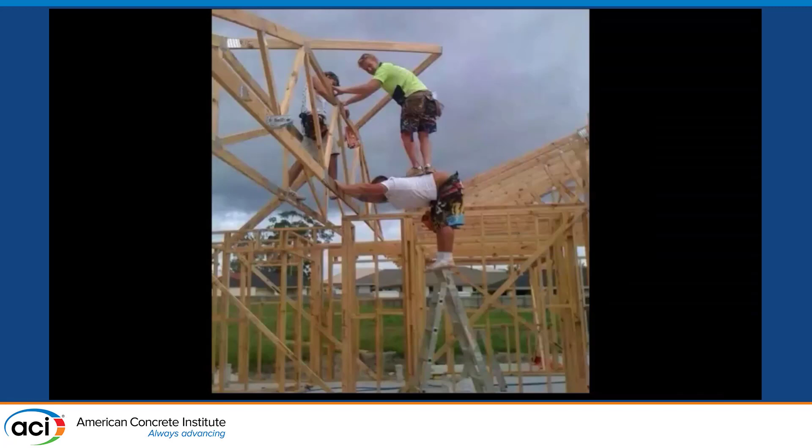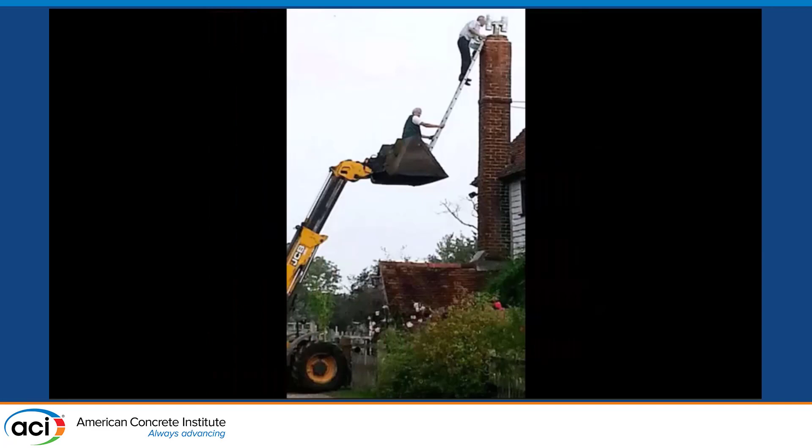to be talking about. So this first one, these guys, they've got a short little ladder here and not quite enough height to it, so you get one big strong guy and presto, you don't need scaffolding, right? Who needs scaffolding when you have guys like that? Here's another one. You've got a piece of equipment, but the bucket doesn't raise high enough. Put a ladder in it, get this dude up on top, and presto, you fix your chimney.

That's collaboration. Another one. Now this is a good one because you've got two ladders. You've got this thing going all the way up and then a small one strapped to it and a guy changing a light bulb. And then for collaboration, you've got a supervisor down here thinking, man, I'm glad I'm not up there. Glad it's him and not me.

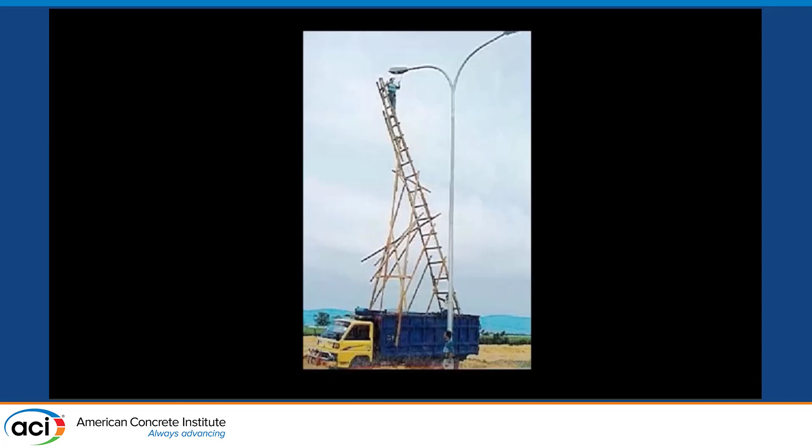Now, speaking of ground, I want to ground this presentation and talk about why collaboration matters. So the outline of the next 20 minutes, I'll discuss why collaboration is so critical to project success. I'll give some case studies, good and bad, and then discuss a little further about PRO, how it will help the industry. I hope most of you, maybe all of you, were at the luncheon today, where we had some great speakers, Dan Baker, Jeff Coleman, and following me, by the way, is Charlie Thornton, one of the most renowned structural engineers on the planet. So we have some great opportunities for learning lined up for you here today.

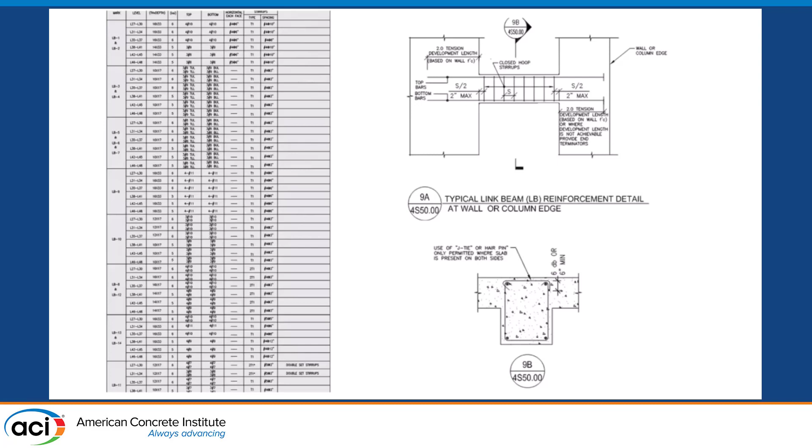It's impossible to build. This beam was literally impossible to build because they had 8 top bars, 8 bottom bars, 4 stirrup legs, the perimeter stirrup plus these 2. You've got the ears up here on the stirrups, of course, too, that get in the way. The out to out on the stirrup is 9 inches. So from this face to this face is 9 inches because you're 1.5 inches. It's a 12-inch wall, by the way, 12-inch wall.

So you're 9 inches out to out, and then you have to get all these horizontal bars through the shear wall vertical bars beyond. So you have about 6 inches right here. You've got to get all that through there. It was impossible. We laid this out; this was one of hundreds of link beams that we drew up, just trying to understand what had gone wrong

here in the field. Now, in the normal course of events, if the drawings had been done this way and they were issued and the contractor couldn't build the beams, you'd have an RFI, you'd have a discussion, you'd have some job site meetings, and you'd fix it. You'd fix it. It shouldn't have been issued that way by the structural engineer, but it was. It could have been fixed before it was built, but the communication had dropped to zero.

The architect was fighting the engineer was fighting the contractor was fighting everybody else. It was just a fist fight, and the contractor was determined to make schedule. So what he did was he would install as much rebar as he could fit, and the rest he'd just leave it out. That's how they built the building.

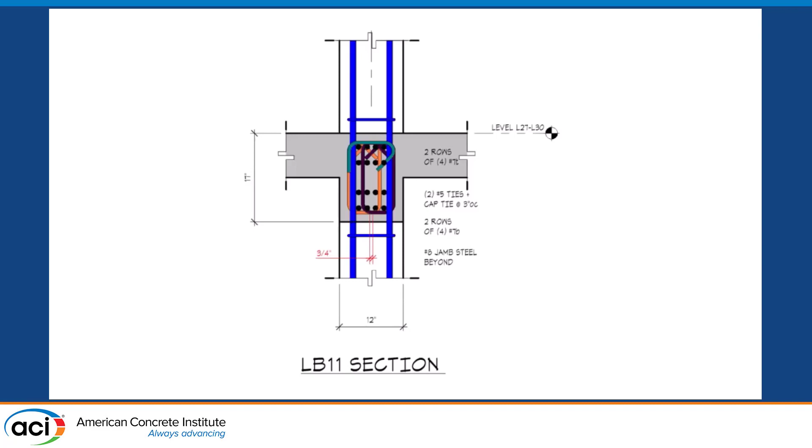Now I want to go to a good example, what I think is a good example. This happens to be one of our projects in my office right now, and just to set the stage, it's called The Bellevue because it's in Bellevue, Washington, about a mile from my office, a little less than that. And what it is, 3 towers. There's a 5-star hotel over here. Actually, 5-star hotel, 2/3 of the way up, and then residential. 2 other residential buildings over the top of a retail podium, over the top of 6 stories of subterranean parking.

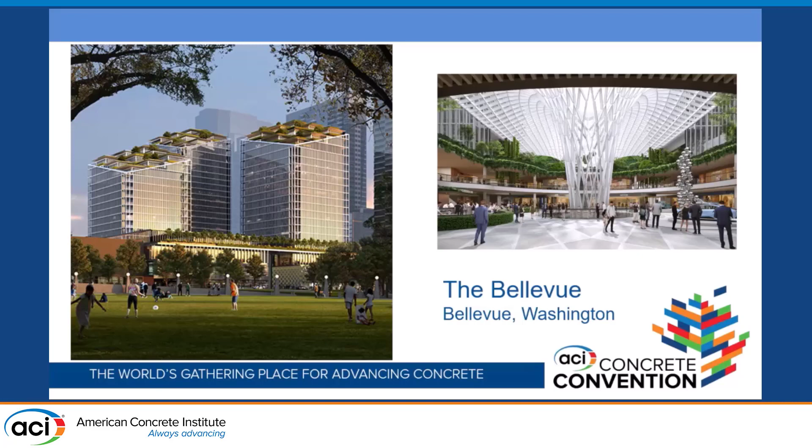Here's a shot of what it will look like. It's a very, very high-end retail space. One of the most successful malls on the West Coast happens to be right over here, and they want that to be contiguous and joined at the hip, essentially, to this new building. And so it's all being driven by the opulence of the retail and the buildings above, and the structure took a back seat, at least initially. Here's another picture of it. This shows a view from the Bellevue Downtown Park looking to the northeast.

And here's a cross section. You can see 2 of the 3 towers and the retail, 3 stories of retail here, actually 4 stories, and then 6 levels of subterranean parking. And the challenge structurally is, as anybody who's worked on almost anything knows, that the columns in the tower may or may not align with columns in the retail, which probably don't align with columns in the parking.

So you got to find a way to get the columns from here down to there and minimize the amount of transfer. That's the goal. That's the goal. So you've got to get the tower columns down through the retail, down through the lobbies, down through the parking, and get them into a foundation without too many transfer beams.

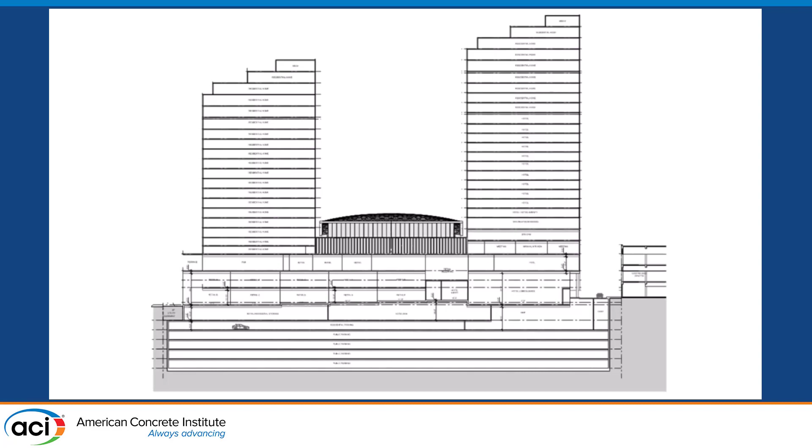A little more background information on what this project is about. You can see this very dramatic sort of skylight wing. The architect on this project is out of New York City. I won't mention their name, but they're a very well-known, high-end global architectural firm. And they've done some beautiful, beautiful, beautiful work.

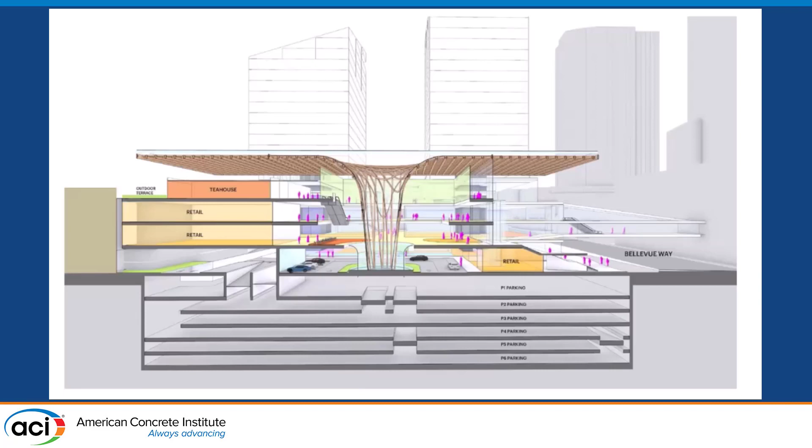Now, diving into some of the detail. If we look at the typical parking plate, we have 6 of these, and you can see that it's unusual in the fact that it's one-way angled parking throughout. So the owner of this building, who owns a neighboring shopping center, is really, really adamant that this be user-friendly parking. Minimal columns.

So we have 52-foot spans across the parking modules, columns at normally 30 feet on center north-south, and we need to preserve that throughout the entire parking plate for all 6 levels. So it will park just like you're driving into Safeway. Instead of having columns at the rear bumpers, which we would like to do, we're spanning 52 feet.

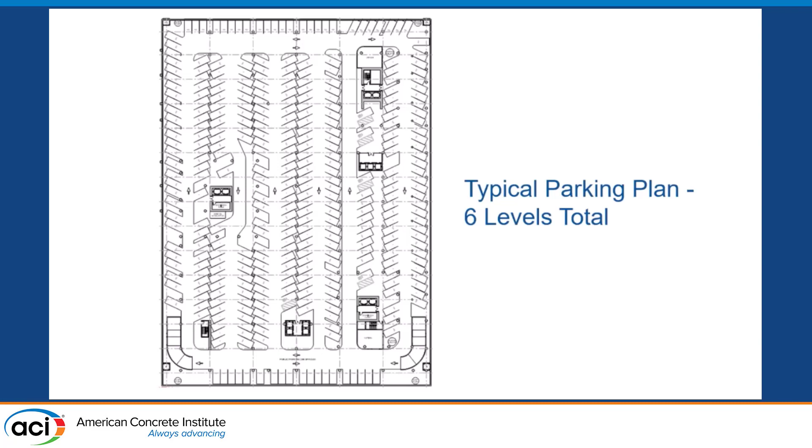What that looks like in a blow-up is right here. So this is the typical parking grid. So we're 52 feet center to center on the overall module. We interlock the stalls. And by interlocking the stalls and going at about a 70-degree angled layout, we can make 52 feet work with one-way traffic. Very, very user-friendly. Very comfortable to park in, 30 feet in the north-south direction.

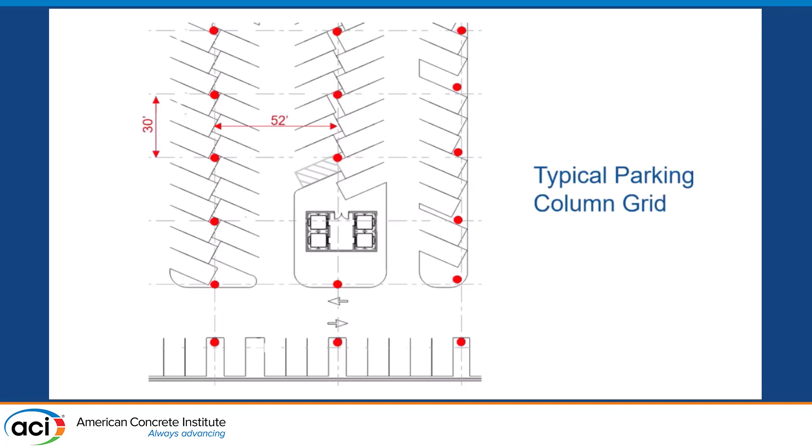So that's what we have to hit with all the columns that come from the towers down through the retail. We have to transfer into that parking grid. And initially, we started out with 2 ideas structurally. We said, all right, let's take all of our tower columns down. We'll put a big transfer floor in up here. We'll transfer off into a grid that works, and then down we go. Down through the retail, into the parking. That was our initial thought.

This is one of 2 options we looked at initially. So a great big transfer floor, transfer off into the parking grid, and then down we go. The other option we looked at was slant columns. So we bring columns from the tower down into the retail, and then we tip them 1 floor, 2 floors. We actually tip some of these 3 or 4 floors, depending on the angle. We just find a column. So we look at a column, and we look at the nearest column down here, and we start slanting over to hit it. Real basic.

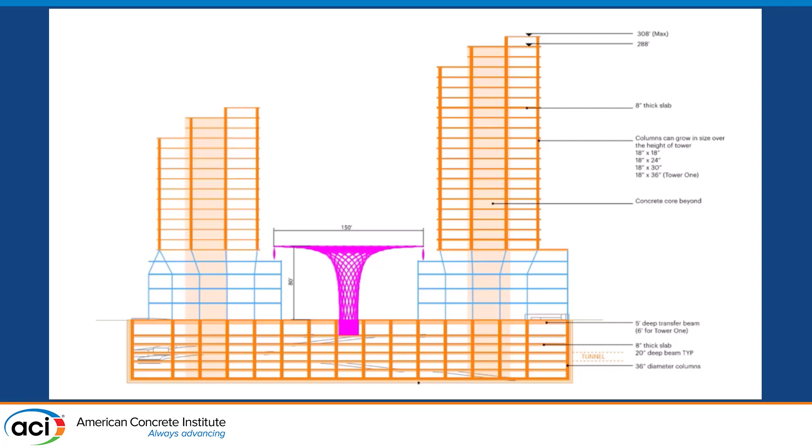You just have to be very careful of all the thrust forces that develop, because you get thrust forces going in different directions that have to be very carefully reviewed and analyzed. And what we ended up with was a combination of the 2. And this was a total mess. This was really a mess. This is where we were in conceptual design.

So we had some slant columns. We had some transfer beams that you don't see very clearly, but they're up underneath this floor. This floor. We also had some transfer beams down here. So we had slant columns. We had some trusses. We had a few more trusses over here. We had slant columns in here.

It was just a mess, and it priced out very high, because we took the drawings through conceptual design, partway into schematic. We sent it off to the general contractor. They priced it up, and the owner had sticker shock to the tune of about $200 million. It was over $1 billion when it was initially priced. So we stopped and we said, look, why don't we all sit down and let's start with the towers.

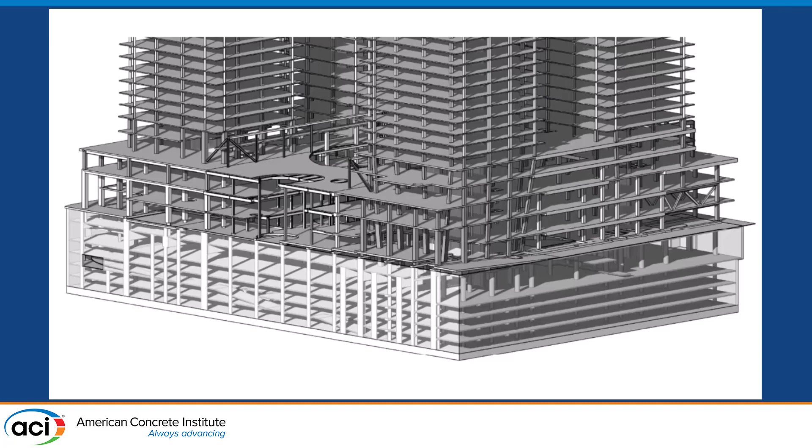Let's minimize the number of columns in the towers. Let's let the structural control the layout and just see if we can make the architecture work. So let's go up into the towers. Let's minimize the column count in the towers, because the fewer columns we start with, the fewer transfers we have as we drop down through. Let's lay it out to optimize the structural floor plate, and then let the architect play with it and see if the units still work.

And we did that, and this is what we ended up with. So this was the original floor plate, and we had 20 columns per tower, 60 columns total. And this was developed by placing columns exactly where the architect wanted them. So he laid out all the units, optimized the unit layout, and then we found locations for columns. We also had 2 outriggers off our core. We've used these quite commonly.

If we have too long a span from the core to our column, we'll build an outrigger beam with the floor plate, so it's poured with the floor slab. It's just a cantilever beam basically off the core, and we tie that beam steel back into the core wall with threaded inserts. So when the core wall is poured, we have threaded inserts in the wall. You come along to pour the floor, you thread some steel into the inserts, put a beam form in, and now we have this little wing off the core that lets us span from the end of that beam out to here instead of from here to the core wall. So we shorten the span and we eliminate some column.

But suffice it to say that was a very complicated floor plan on the left. That was the original scheme. What we ended up with after we optimized the floor plate structurally was 12 columns instead of 20, no outrigger beams, and 8 transfers instead of 14 for each of the towers at the podium. So we eliminated 6 transfer conditions for each tower. So 18 transfer conditions were eliminated.

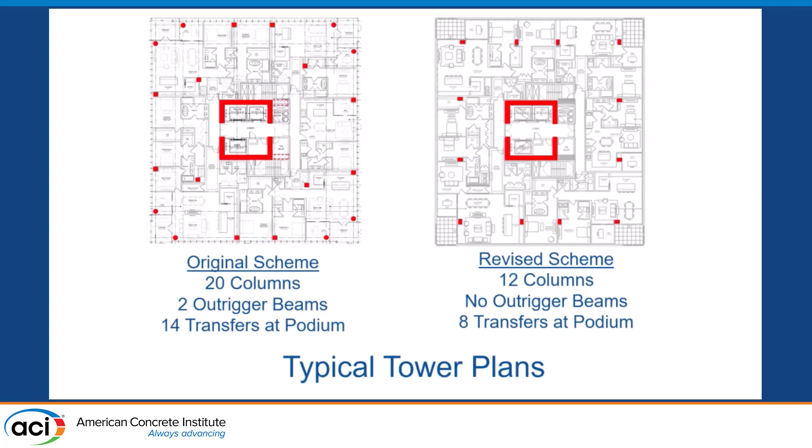The structure is actually more efficient on the right than it is on the left because we have cantilevers of 10 to 12 feet around the perimeter. And cantilevers are very beneficial for the floor slab. So we have a more efficient structure. We have elimination of transfer beams. We have a happy architect and a very, very happy owner. So that was an example of the collaboration process.

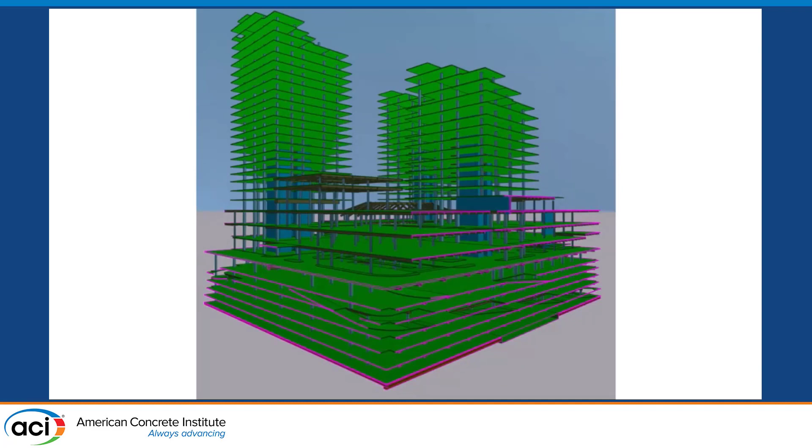And just a few more slides here, Phil. I'm almost done. You can see now how clean this is. This is one of our current models. And all of the tower columns just drop straight on down. That's one vantage point. Here's another. All the columns drop straight on down through the retail podium into the garage. And here's the final one.

And this shows what we're doing. We're eliminating all post-tensioning at these levels in the concrete tower. So we're adding some drop heads. So this is mild rebar here and here and here. And then we go to post-tensioning up there, all the way up the tower. And the infill is all structural steel. And then the garage is cast-in-place concrete.

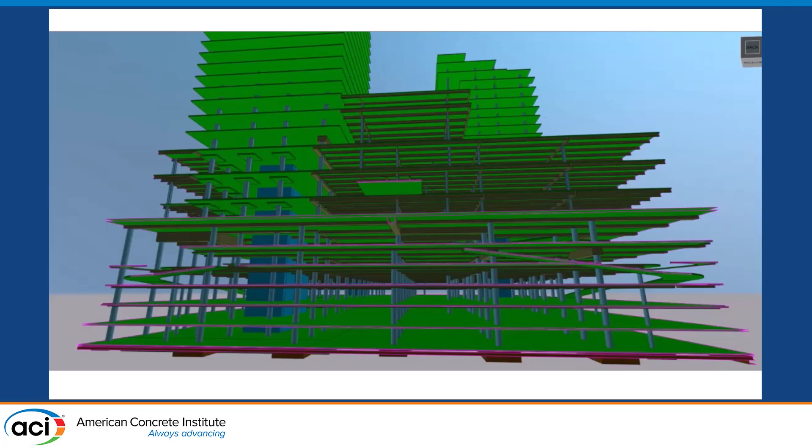So that's an example of how the collaboration process can work and should work, and the fact that you can have happy people all the way around when you execute it properly. So the motto, I should say, the takeaway is, teamwork divides the task and multiplies the success. When you can create teamwork, with all the people under one roof, sitting around a table, working in a spirit of cooperation and trust, where they trust each other, you can create magic.